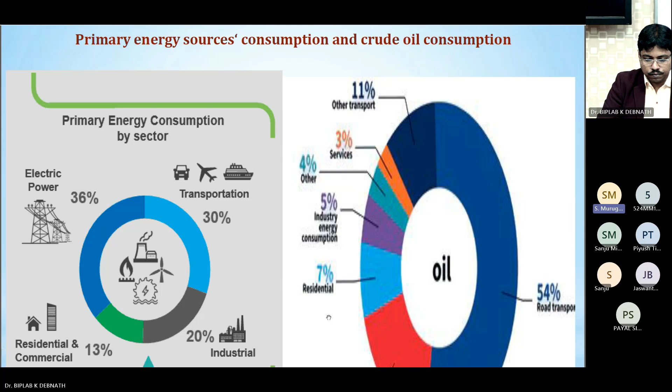So if you see this slide, the primary energy consumption by sector, in the left hand side of the slide you can see the primary energy consumption accounts for 36% in electric power generation, followed by transportation sector which accounts for 30%, and then 20% is shared by industrial sector, and the remaining goes to residential and commercial sector.

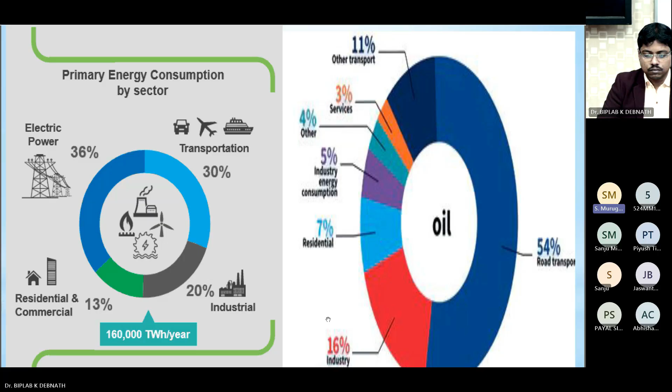Now on the right hand side of the slide, you can see the oil consumption in different sectors, especially crude oil. Crude oil is mainly utilized in transportation sector, especially road transport. It accounts for 54%. Then industry consumes 16%. Then the remaining goes to residential, service sector, industrial energy consumption, and other sectors. Next, please.

So it is inevitable to avoid the consumption of these primary energy sources. Why? Because crude oil, coal, everything is available by nature. So you have to continuously use them. Not using coal and petroleum fuels will also give problems. So in that sense, we can use these primary energy sources to some extent in future, but we have to switch over to some other alternative fuels which can substitute.

Of course, we cannot completely eradicate the use of primary energy sources, but we can replace, let's say, 20 to 30 percent by the use of alternative energy sources. Especially nowadays we use renewable energy sources like solar, wind, hydro and ocean thermal energy sources. But apart from that, we can use biomass also, which is abundantly available in nature.

Now, in transportation sector, we cannot control carbon dioxide completely because all automotive vehicles are mobile in nature. So CO2 is continuously emitted because vehicles are moving. Therefore, we cannot completely control CO2 emission with any device.

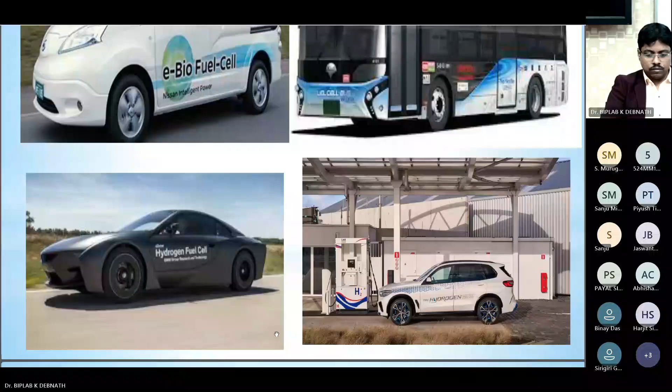Actually, we are thinking about using electric vehicles everywhere, but recently BMW says goodbye to electric vehicles. It says that it will bring out hydrogen engines which can meet the demand for clean vehicles. As I told, electric vehicles have different issues or challenges that cannot be met immediately.

So we can use electric vehicles to a certain extent, but in a country like India, where there is a huge population, we cannot completely shift over from conventional ICE engines to electric vehicles. It will take a lot of time. So in that sense, BMW and other companies now in India want to parallelly bring out hydrogen engines, which can be used in hybrid mode with electric mode.

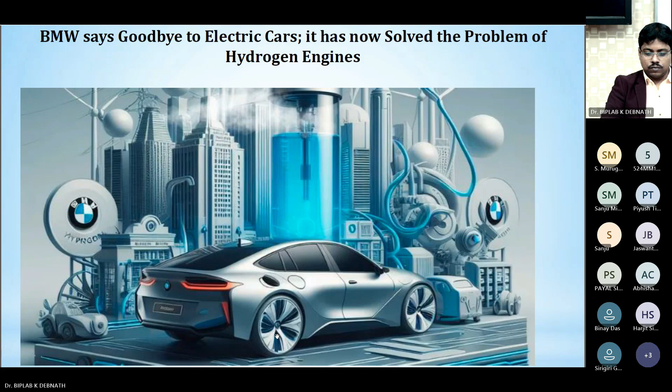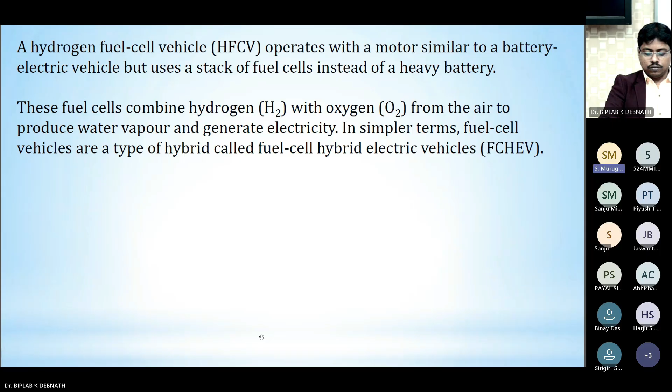So as I told, of course, we can have combinations of internal combustion engine and electric vehicle, or internal combustion engine, fuel cell vehicle, and electric mode, fuel cell and electric mode. These kinds of combinations were proposed many years ago, but now they are slowly in transformation. It will be realized soon. Already, these kinds of vehicles are available in countries like USA, Canada, Germany, UK, and all. But it will take a lot of time for this to be realized. Next, please.

So, hydrogen. Why do we have to focus on hydrogen? As I told, we have different options of using alternative fuels like biodiesel, ethanol, biogas, LPG, natural gas, and of course hydrogen. All these things are there. Among all these fuels, hydrogen is focused because, as I told, it's a carbon-free fuel. There is no carbon in it.

Hydrogen was earlier called the water creator. That was proposed by a scientist called Cavendish. Actually, hydrogen can react very well with oxygen, and it will form water, as you know. If you take water, it has two atoms of hydrogen and one atom of oxygen. So the simplest way of getting hydrogen is by splitting water into hydrogen and oxygen.

Hydrogen is a colorless, odorless, and non-poisonous gas, and it's lighter than air and helium. When you burn hydrogen, it will show a pale blue color, but it's almost invisible, so you cannot detect the flame you get when you burn hydrogen. What are the merits of hydrogen? It has a very high gravimetric energy density. The calorific value or heating value is very, very high. It's about 1,20,000 kilojoules per kg, and it is available everywhere. Water, you can take it.

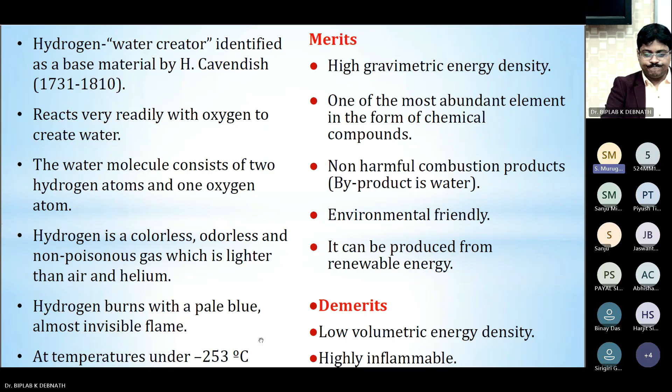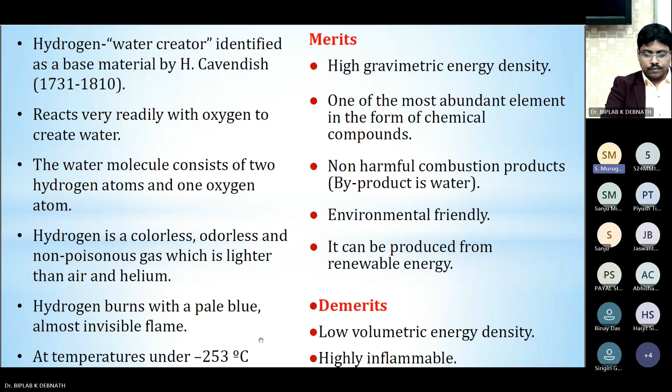It is one of the most abundant elements in the form of chemical compounds, and you will get zero pollutants like unburnt hydrocarbon, carbon monoxide, carbon dioxide, sulfur dioxide. Nothing will be there. But oxides of nitrogen will be found, but that can be controlled or regulated. Therefore we can call it a very eco-friendly or environmentally friendly fuel, and we can produce hydrogen from different sources.

But on the other hand, you can see there are three drawbacks. One is it has low volumetric energy density. That means you need a very big storage tank to accommodate this fuel in automotive vehicles. People are working on storing hydrogen in the form of solid, which we call metal hydride. There is continuous research going on in this aspect also. And it is highly inflammable, because the flame velocity of hydrogen is very high, so it can quickly catch fire. And it is difficult to store at normal atmospheric conditions, so you have to store it in the form of gas or liquid. Next, please.

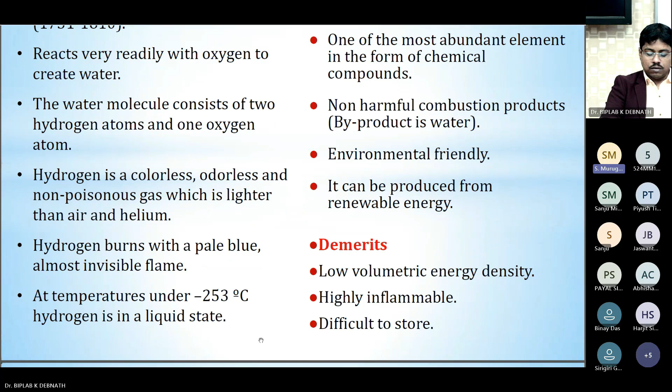So earlier, hydrogen was produced only by electrolysis. By splitting water by electrolysis, we get hydrogen and oxygen. Now, after the realization of alternative fuels and the need for hydrogen, many sources for producing hydrogen have been found. Based on that, in industry, different color codes are given for hydrogen produced from different sources, like green hydrogen, pink hydrogen, yellow hydrogen, turquoise hydrogen, brown, blue, white, like this. Although we give these color codes, they slightly vary depending on the country and time. Next, please.

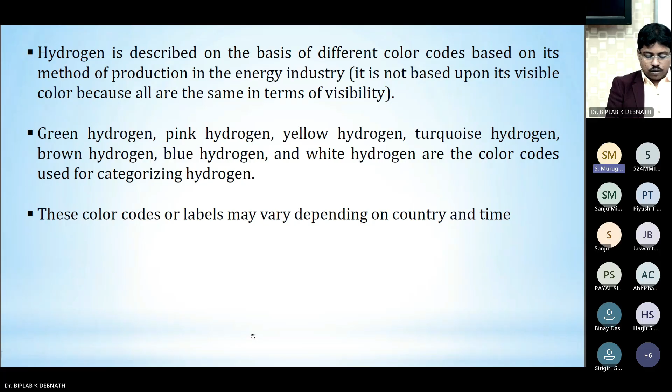So here the hydrogen production color codes are given. As I told, green, pink, yellow, blue, turquoise, gray, brown, like that. Each method by which hydrogen is produced is given in the second column. The third one is the feedstock or raw material we use to produce hydrogen, and the greenhouse gas footprint is also given.

Now, if you see electrolysis, as I told, that is one of the simplest ways to produce hydrogen. You split water so that you get hydrogen and oxygen. For splitting water, you need electrical energy, right? That can be obtained from different sources like wind, solar, hydro, geothermal, or tidal, whatever renewable energy source you can adopt. If you adopt it to break water through electrolysis, then the hydrogen you get is called green hydrogen. The greenhouse gas footprint is very, very minimal because we are using renewable energy sources in this method.

Now, hydrogen is used in many industrial applications, not only as fuel. Here, the left-hand side of the slide shows the different raw materials or sources by which we produce hydrogen. As I told, we can use coal, natural gas, oil, or electrolysis.

For electrolysis, we need electrical energy that you can obtain from different renewable energy sources. Coal, natural gas, and oil are treated as fuel or feedstock from which we get hydrogen. Most of the hydrogen is produced from natural gas and oil, then coal and electrolysis.

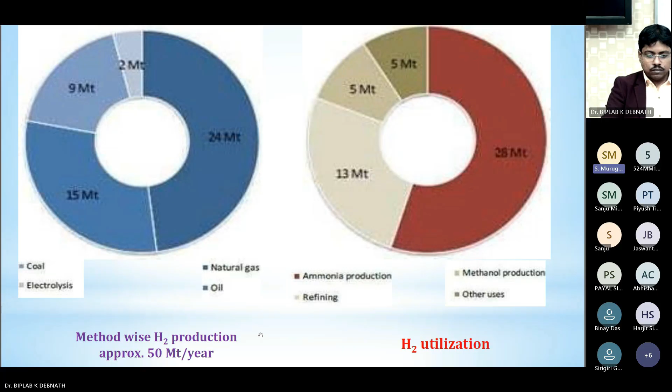Here you can see hydrogen utilization in industrial applications on the right-hand side of the figure. It is used for ammonia production, methanol production, refining processes, and other uses. Hydrogen used in ammonia production is about 28 megatons, followed by other applications.

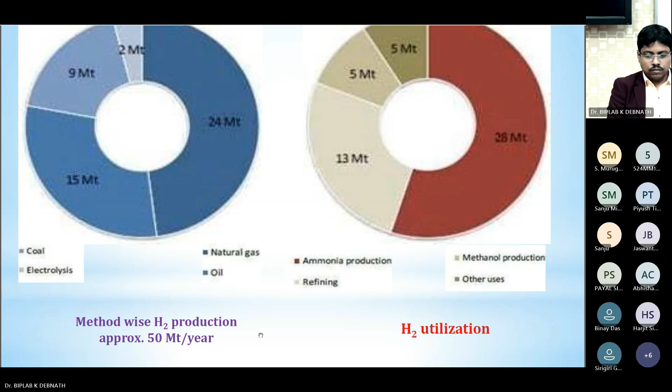Apart from these applications, nowadays we want to use hydrogen for automotive applications as well. So the demand for hydrogen production is always increasing.

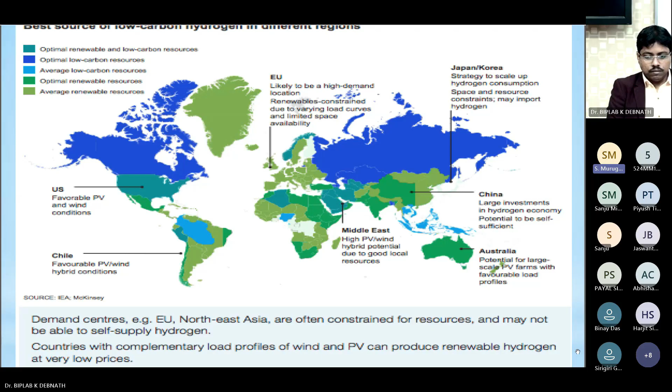This slide shows hydrogen production from different methods using different sources in each and every country in the world. As I told, we can use coal, biomass, or renewable energy sources like solar and wind to produce electricity first, then produce hydrogen. Different countries use different sources, highlighted in different colors here, green, blue, light blue, and so on.

Now, how we can produce hydrogen is very important. Electrolysis is a very simple process because you take water, supply electricity, and break water into hydrogen and oxygen. That's all. But other than this, we can use different sources like biomass, coal, natural gas, biogas also.

So we classify hydrogen production by using two different sources: fossil fuel and renewable energy sources. Under fossil fuels, we have two methods: hydrogen reforming and hydrocarbon pyrolysis. Under hydrogen reforming, we have three methods: steam reforming, partial oxidation, and autothermal reforming.

On the other hand, for renewable energy sources, you can use solar, wind, biomass, everything. We classify those into two: biomass process and water splitting. In water splitting, you have three methods: electrolysis, thermolysis, and photolysis. Electrolysis is the simplest, where by supplying electricity you get hydrogen and oxygen from water. Thermolysis and photolysis apply heat energy or solar energy for splitting water.

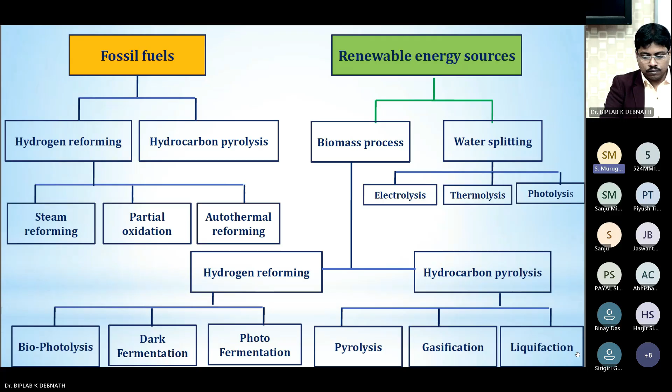When you use biomass as a source, we have two classifications of methods: hydrogen reforming and hydrocarbon pyrolysis. Hydrogen reforming has three methods: biophotolysis, dark fermentation, and photofermentation. Hydrocarbon pyrolysis has three methods: pyrolysis, gasification, and liquefaction.

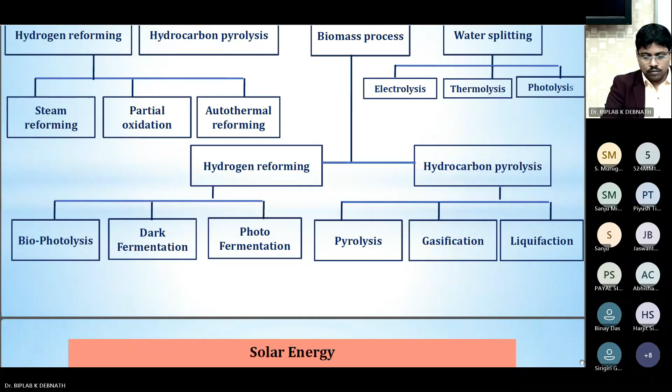Now, worldwide, emerging research is going on hydrogen production using solar energy, and then wind and other energy sources. Solar energy can be used to produce hydrogen by adopting different pathways or routes. From solar energy, you can get heat using a concentrated solar power plant, and that can be used to produce hydrogen via thermolysis.

You can also produce mechanical power from a solar power plant. Heat will be converted into mechanical energy, and then you can use mechanical energy to produce electricity, and that electricity can be used to break up water through the electrolysis process.

Other energy sources like wind, geothermal, ocean, and hydro can be used to produce mechanical energy or mechanical power first. Then that mechanical power will be converted into electricity with the help of a turbine, and that electricity can be fed to produce hydrogen via the electrolysis process.

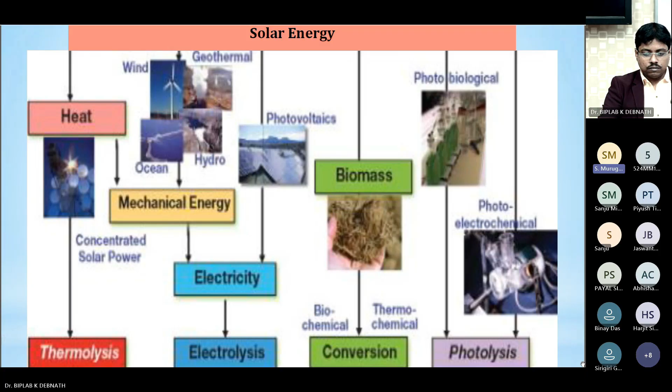As of now, commercially hydrogen is produced by involving four methods: steam reforming, water shift gas reaction, partial oxidation, and autothermal reforming. The main feedstock used to get hydrogen through these conventional processes is coal, natural gas, LPG, and naphtha. These are called carbon feedstocks, and they can be converted into hydrogen by adopting any one of these processes.

If you take steam reforming, normally we call it SMR, in chemical engineering or chemical industry. As I told, it can use a variety of carbon feedstocks. Biomass also can first be converted into biogas, and then it can be converted into hydrogen via steam reforming. Now, steam reforming is the simplest form of using methane as a feedstock. That's why biomass can first be converted into biogas, and then we convert it into hydrogen via this method.

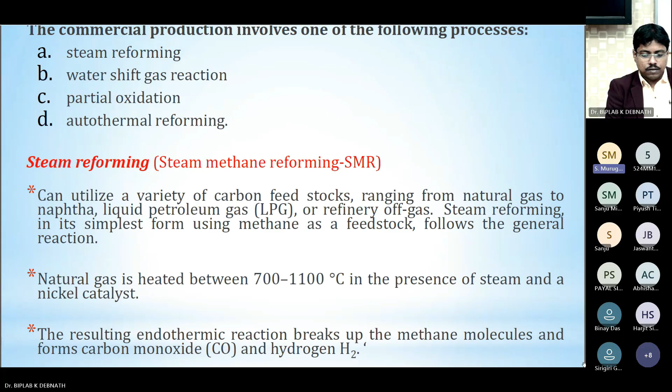So here, of course, this CO gas is separated from hydrogen. We have elements like CO, CO2 and other greenhouse gases that get separated. Depending on what kind of feedstock we use, you will get very high quality or low quality hydrogen. 1 ton of hydrogen produced will also produce 9 to 12 tons of carbon dioxide. But people, especially now in developed countries like the US, are capturing this carbon dioxide and utilizing it in different means from these refineries or hydrogen production units from natural gas.

So as I told, when you subject natural gas to a high temperature, you get this reaction: CH4 plus H2O gives carbon monoxide, 1 mole of carbon monoxide and 3 moles of hydrogen, like that.

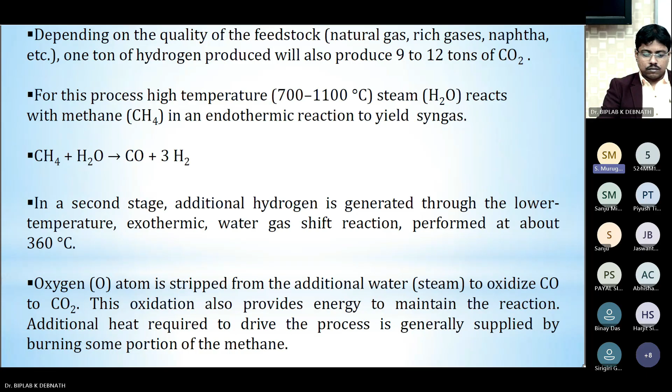Now, of course, we have a second stage or step. In that, additional hydrogen is produced through the low temperature exothermic water gas shift reaction, carried out at a temperature range of 300 to 400 degrees Celsius, again depending on the feedstock. Here, oxygen is stripped out from the additional water supplied, normally steam, to oxidize CO into CO2. That is called the water gas shift reaction.

This water gas shift reaction forms CO2 and H2 using water and CO at elevated temperature. You can use a catalyst if you wish, again depending on the kind of feedstock we use.

Then, of course, partial oxidation. Normally it's a basic gasification reaction, which helps to break down hydrogenated carbon feedstock, it may be coal or petroleum coke, whatever it may be. With the help of heat, we can crack it down or break it to get CO and H2. So that's called partial oxidation.

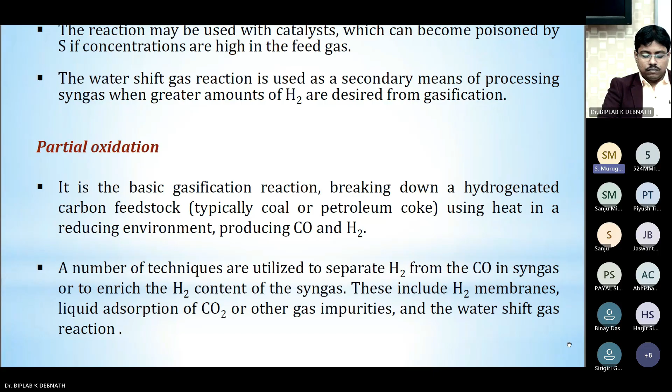Once you get this CO and H2, you can adopt different methods to separate H2 from that. This gas composition, normally CO and H2, is called syngas, and that will be separated, meaning H2 and CO are separated. We can adopt membrane technology to separate the hydrogen, or we can also use liquid adsorption of CO2 or other gas impurities, so that we can get more amount of hydrogen from this partial oxidation.

Then, of course, autothermal reforming. This is the term normally used to combine steam reforming and partial oxidation in a chemical reaction. It occurs when there is no physical wall separating the steam reforming and catalytic partial oxidation reactions. Here also we use a catalyst that controls the entire reaction, so that we get hydrogen at the end of the process. This autothermal reforming can operate at a low temperature compared to partial oxidation, so at very low temperature also you can produce higher amounts of hydrogen.

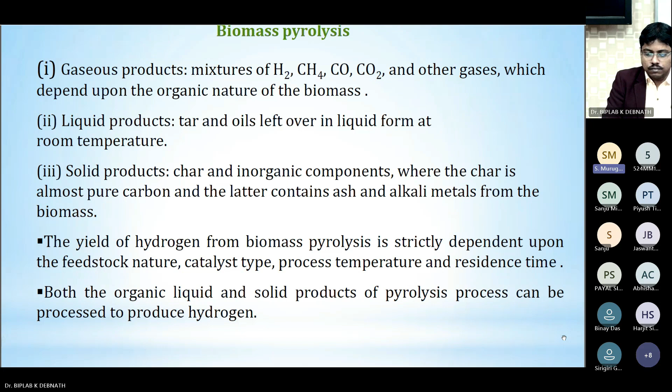Now, biomass can be used to produce hydrogen by adopting two different routes. One is called biochemical conversion and the second one is thermochemical conversion.

In biochemical conversion, we use yeast or bacteria, microorganisms, to fractionate the feedstock to get either biogas or ethanol through biochemical conversion. We have two methods: anaerobic digestion and fermentation. Through these two routes, we can produce biogas in anaerobic digestion and ethanol in the fermentation process. With the help of microorganisms, with or without application of pressure, we can get biogas from digestion and ethanol from fermentation. This can be further converted into hydrogen, which I'll come to later.

In thermochemical conversion, as I told earlier, we have mainly three methods: liquefaction, pyrolysis, and gasification. In this process, the feedstock is converted into hydrogen by adopting either pyrolysis, gasification, or liquefaction. Here we need to apply heat, slightly, with or without pressure.

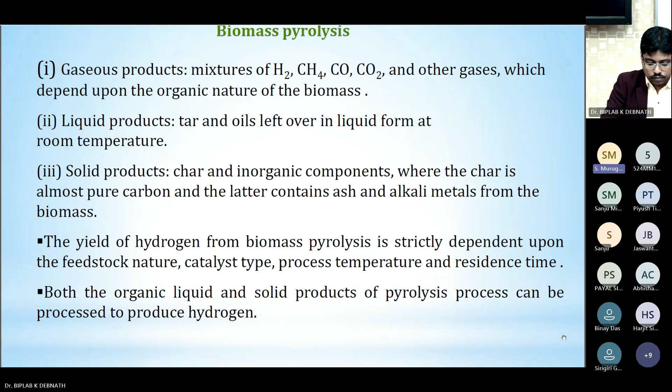Now people are taking oil which is obtained from the pyrolysis process and converting it into hydrogen. The solid product you normally get in a pyrolysis process is called char and inorganic components. You will get a very small amount of hydrogen from that, but people are working on this as well.

Next, please. Next. So this slide you can show, of course.

Actually, in pyrolysis, any biomass substance is fed into a pyrolysis reactor that is completely free from oxygen, or with little presence of oxygen. That pyrolysis reactor is heated up. When the biomass in the reactor is heated, volatile matter rises from the biomass, and that volatile matter is condensed in a condenser, so that you get the three different products I told you about: gaseous product, liquid product, and solid product.

Normally, if you use a biomass substance, the liquid is called bio oil. The gas you get, which is not condensed, is called pyrogas. That is composed of carbon monoxide, carbon dioxide, and hydrogen, and the hydrogen can be separated. People are working to convert this bio oil into hydrogen, and finally you get a solid substance in the reactor.

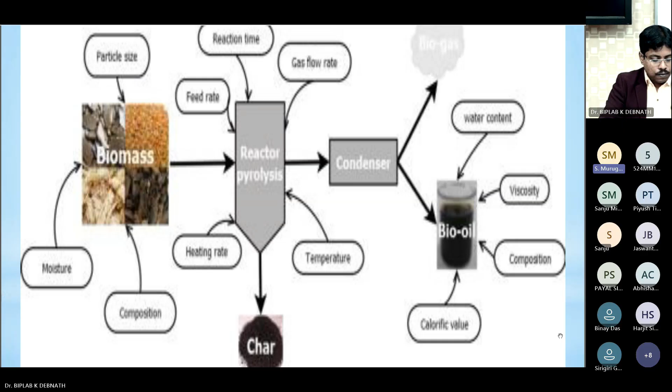Now there are different parameters that affect the feedstock you use in the pyrolysis reactor. If we take biomass, the important parameters that affect the hydrogen yield in later stages depend on the feedstock you first give as input: particle size, moisture, composition of feedstock, like that. In the reactor, different parameters influence, like feed rate, heating rate, temperature, gas flow rate, and retention time or residence time of the pyrolysis.

These factors influence the quality of the three products you get: bio oil, biochar, and the gas which is not condensed. These three products vary according to the type of feedstock you use and the influential parameters. Now this bio oil is mainly focused on now to get hydrogen. The quality of bio oil depends on the water content, viscosity, and the bio oil composition and nature.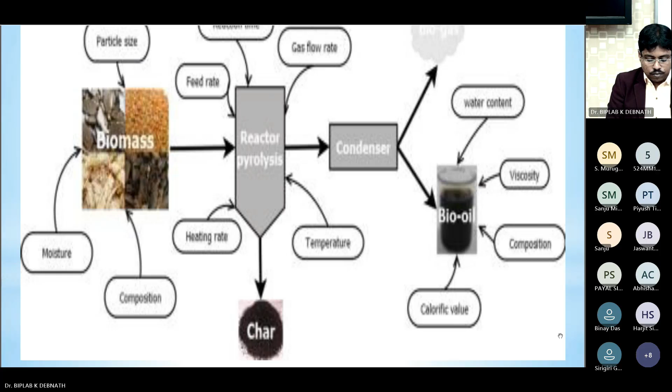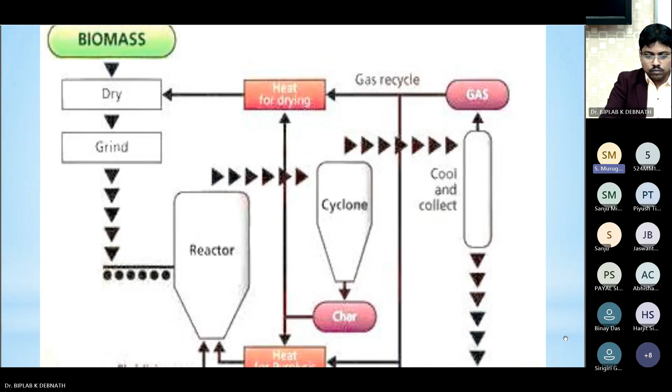So here the illustration of pyrolysis is given. Normally you can take any biomass, first dry it, then grind it, then feed it to a reactor and heat it up. As I told, pyrolysis can be carried out either with a little presence of oxygen or completely free from oxygen. When you want it completely free from oxygen, the reactor must be evacuated before you feed it. So people purge nitrogen, which is an inert gas, into the reactor, completely evacuate oxygen, and then use the reactor for the pyrolysis process.

The volatiles raised from the reactor are first sent to a cyclone separator, where high density particles are removed. Then the gas is given to a condenser. When the volatile matter is condensed, you get the bio oil. Some of the volatile matter may not be condensed; that is taken as non-condensed gas and used for drying the biomass feedstock. You also get char, which can be separated from the cyclone separator as well as the reactor, and that can be further processed to get hydrogen in a minimal portion.

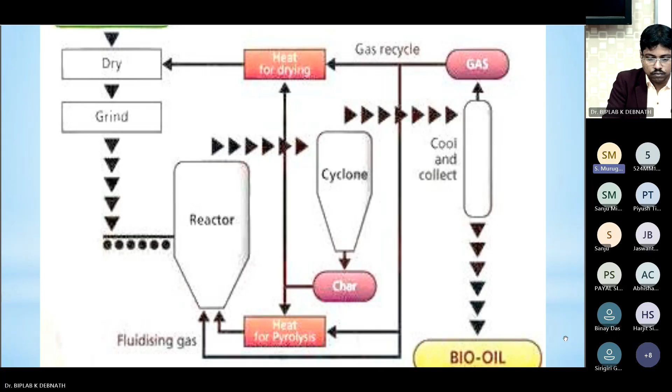That I don't focus. Only people now working on is that to get hydrogen from bio oil and of course gas. Next, please. So here of course different biomass feedstocks were used to get hydrogen using biomass pyrolysis, like wheat straw, pine wood, of course wood, like that.

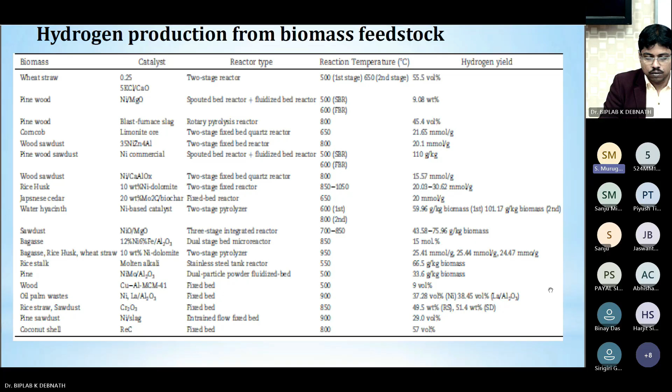Then liquefaction, of course, liquefaction can be given in two forms. One is direct liquefaction and the second one is hydrothermal liquefaction. Of course, you liquefy any substance, that's called normally liquefaction. It's a small process. Hydrothermal liquefaction, that's also called hydrous pyrolysis, where the biomass is converted into liquid fuels in the presence of water

by maintaining a temperature between 226 degrees Celsius to 362 degrees Celsius with the application of pressure ranging from 5 to 20 megapascal. So you have to have a catalyst in this process as well. That means hydrous pyrolysis. So you'll get a liquid product that will be further processed to get hydrogen. So here people, they use aquatic biomass, garbage, organic sludge, like that. They investigated to get hydrogen from this kind of feedstock via liquefaction process. Next, please.

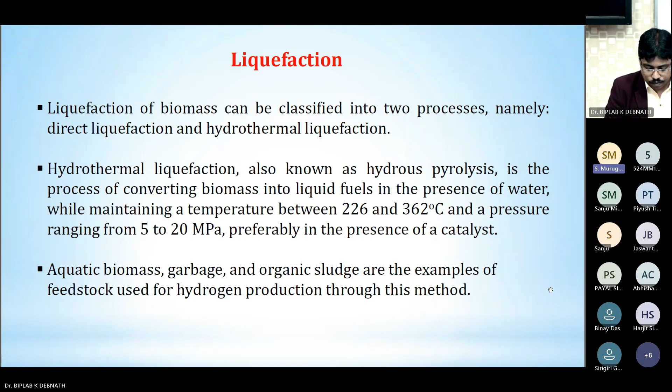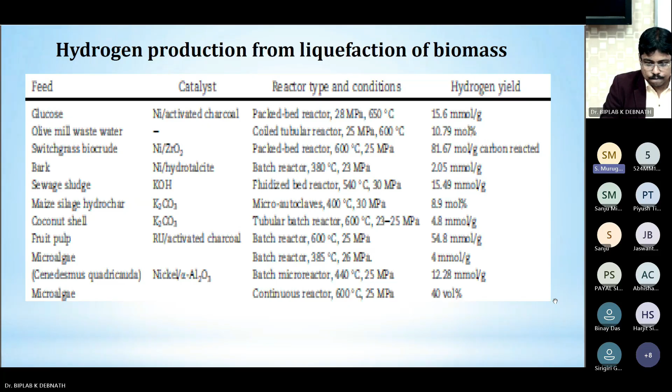Then, of course, here this table shows different feedstocks which are considered to produce hydrogen via liquefaction of biomass. That I just pass it. Next, please. Then biomass gasification. Of course, under thermochemical conversion process, we use gasification also. So here, of course, in gasification, what we do, we feed a feedstock in a gasifier, and oxygen is supplied in very little quantity, and then the gasification process is carried away so that you will get a product called syngas.

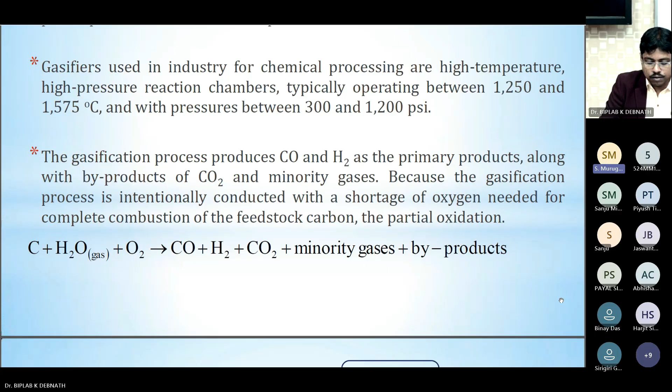That syngas normally is composed of carbon monoxide and hydrogen. So this syngas, of course, will be separated by adopting different processes. So normally in the gasification process, we'll get carbon monoxide and hydrogen as a primary product. Apart from that, we'll get some minor gases also. Minor gases, as well as we get tar. That I'll come to in the next slide. So what kind of biomass you use, based on that you'll get the syngas quality and the tar quality.

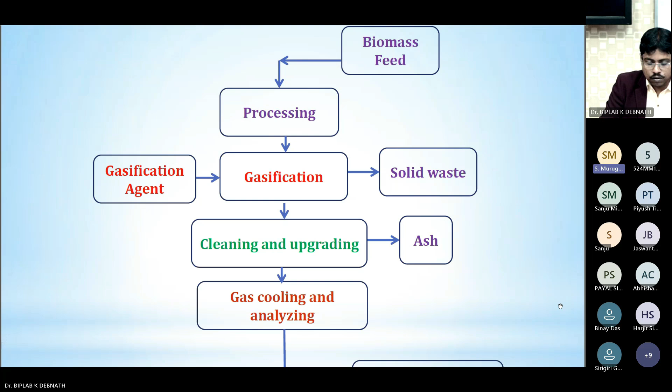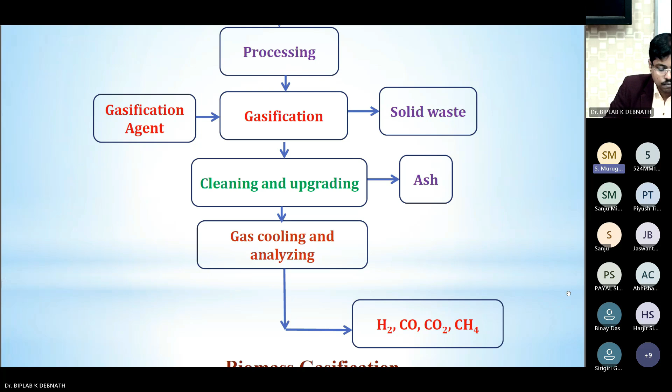So here this slide shows how the gasification is carried out. Biomass is fed, first pre-processed, and then it is given to your gasification process. It's fed into a gasifier. So you have to, of course, supply gasification agent, normally oxygen or air. Then you will get the syngas that will be cleaned and upgraded, then cooled. Then we'll get the separation of gases: hydrogen, CO, CO2, CH4 and all, they'll be separated. This is a basic idea what you get in gasification process. Next slide will give more information.

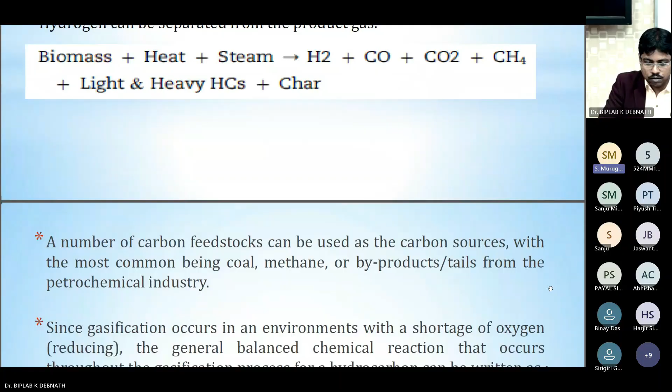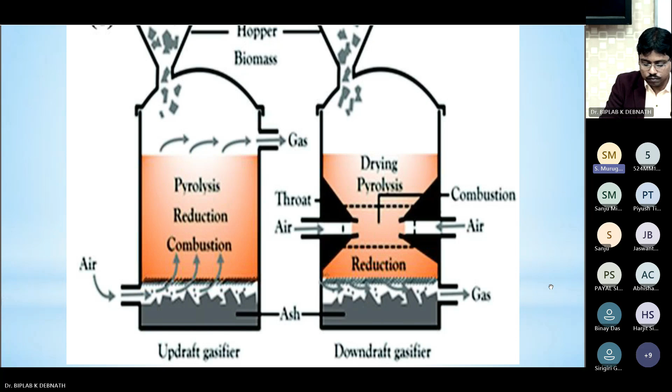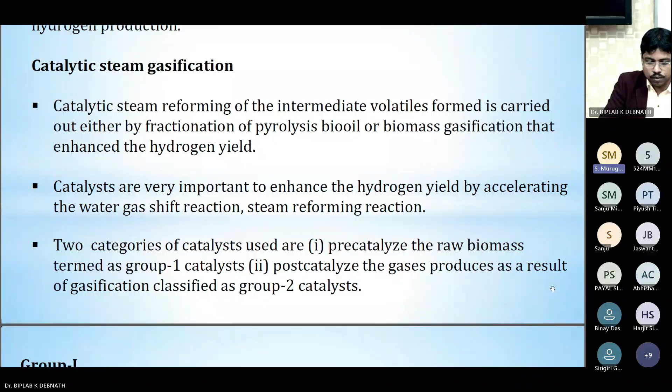So ash is a big problem in the gasifier. Continuous ash removal is a problem. So here, no, previous slide, please. So the quality of syngas is very, very important. Syngas contains carbon monoxide and hydrogen. So there are different issues associated with the gas cleaning and the yield you get for hydrogen.

Normally, the moisture content present in the gas is a big problem, and tar formation is the second problem. Continuously, you have to remove this tar. Normally, you can use dolomite to reduce this tar, and of course, you can increase hydrogen production or hydrogen yield. Moisture content in syngas cannot be completely removed, because based on what kind of biomass we use, some moisture will be present in the gas, and you have to remove that first before cleaning.

Here, once you get the syngas, we can use catalytic steam gasification. Catalytic steam reforming helps to convert intermediate volatiles formed in the gasification zone. Right? So you can use a catalyst to get more hydrogen from the gasification process. Whatever syngas you get has to be further processed to get hydrogen. You can adopt either the water gas shift reaction or the steam reforming reaction. Next.

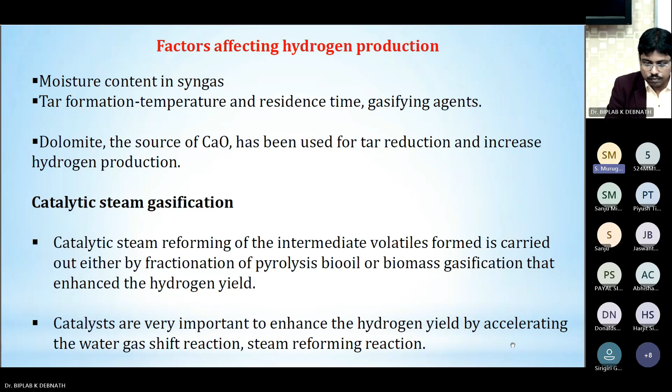So here we can use two different catalysts to enhance hydrogen production in gasification. The primary catalysts are normally added directly to the raw biomass or feedstock before the gasification process, so that you can get more gas. And the main purpose of using this catalyst is to reduce the tar content. But the problem is, as long as you operate the gasifier, you have to continuously remove this tar. So this primary catalyst helps to increase the gasification reaction rate and increase hydrogen production also.

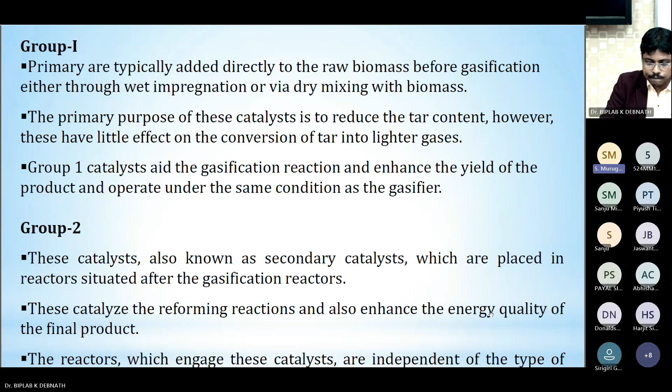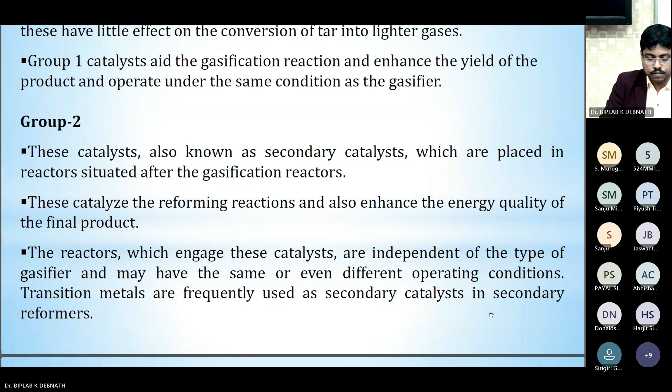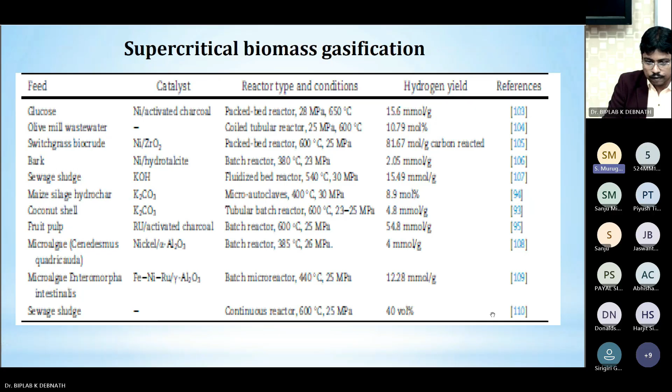Nowadays people also use supercritical biomass gasification, which is a slightly advanced version of this gasification process. When people adopt supercritical biomass gasification, they use different feedstocks like glucose, olive mill wastewater, switchgrass, biocrude, bark, sewage sludge, like that. From that they got hydrogen at different yields, which is shown here. What kind of reactor and what kind of catalyst they use is shown in this table. Next, please.

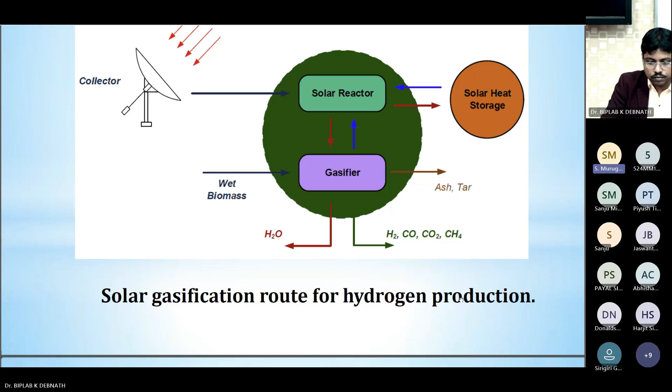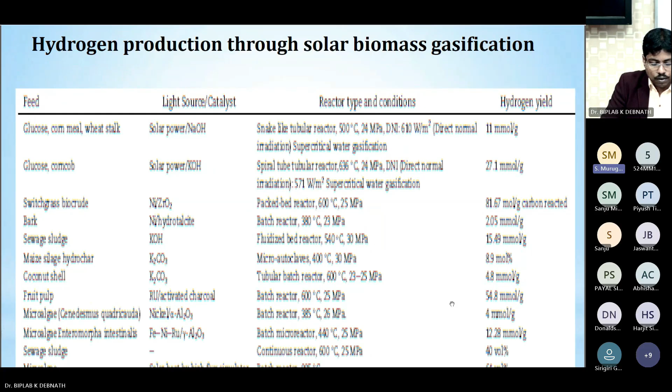So here, when you use solar biomass gasification, the hydrogen yields you get are shown in the last column. The different feedstocks used by different researchers are given in the first column on the left-hand side. Here you can see what kind of light source or catalyst is used in solar biomass gasification, like solar power, and at the bottom, solar heat by a high flux simulator. From there they get the heat, and then they adopt the gasification process. Next, please.

And of course, non-thermal or biological process. Non-thermal means what? We don't supply heat or we don't use heat, but we adopt biological process. As I told, of course, you can use biogas. From biogas, you can get methane. Then methane can be converted into hydrogen. That is one route. In addition to that, we use biophotolysis also.

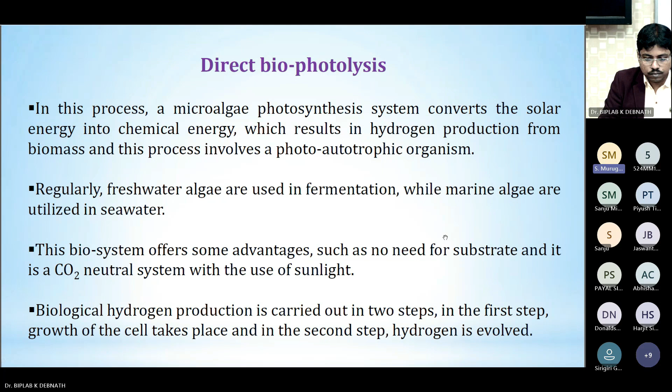So here we have two biophotolysis processes. One is direct biophotolysis and the second one is indirect. So in the direct biophotolysis, microalgae photosynthesis system converts solar energy into chemical energy that results in hydrogen production from biomass. So that is one route. Now it is recently adopted, and it is upcoming research in hydrogen production.

So here generally people use freshwater algae as a feedstock. They are used in fermentation, and marine algae that are utilized in seawater. These two are used for producing hydrogen. So here, with the help of this process, we can get a more amount of yield from biomass substance, especially algae. And here there is no need for substrate.

Like in biogas, what we do, digestion process is carried out, anaerobic digestion process. So here we don't do such kind of process. Straight away we get hydrogen from biomass. So here we have two steps in this biological hydrogen production. One is growth of cell, and the second one is production of hydrogen. Next.

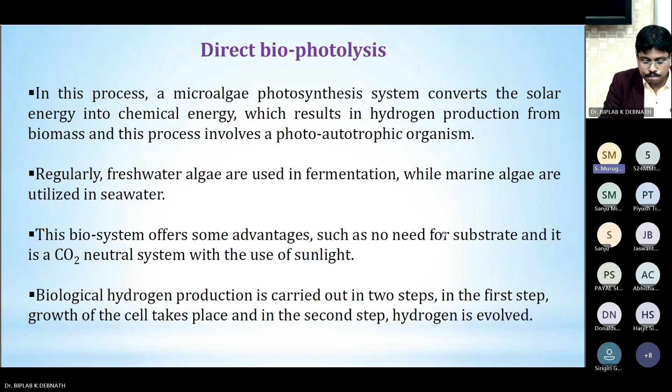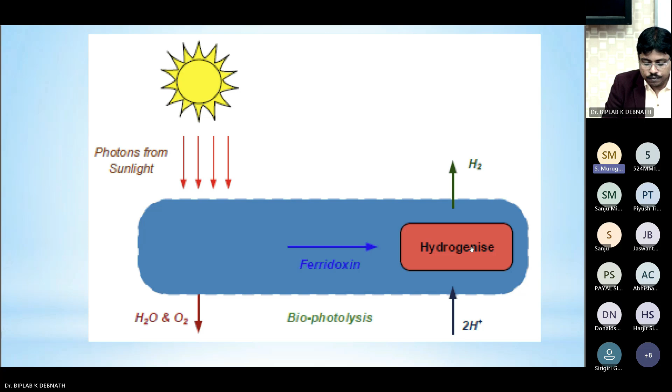So here you are using two systems. One is photo system 1 and the second one is photo system 2. So photo system 1 is used for carbon dioxide reduction, while photo system 2 is used to produce hydrogen by splitting water. So here, of course, with the help of solar energy, we get it.

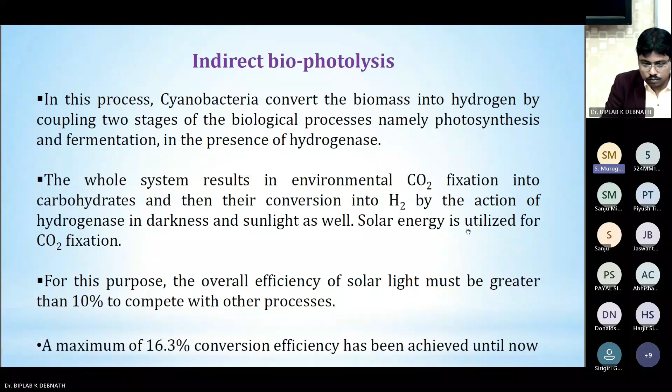Next, indirect biophotolysis. So here, actually, there is a bacteria used, cyanobacteria, that converts biomass into hydrogen by using two stages, as like previous one, namely photosynthesis and then fermentation. So normally this photosynthesis and fermentation is carried out with the help of sunlight, of course, without sunlight and in the presence of hydrogenase.

So here, of course, we get more amount of hydrogen because what kind of feedstock you use, that's very, very effective in producing hydrogen. That's why the overall conversion, in spite of the methods you use in the previous one, we get a maximum 16.3 conversion efficiency from the feedstock to hydrogen. Next.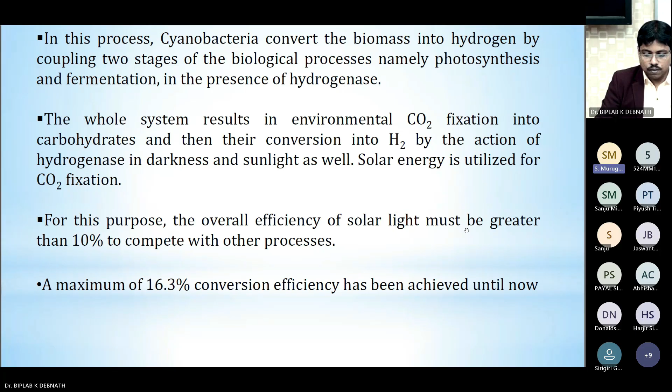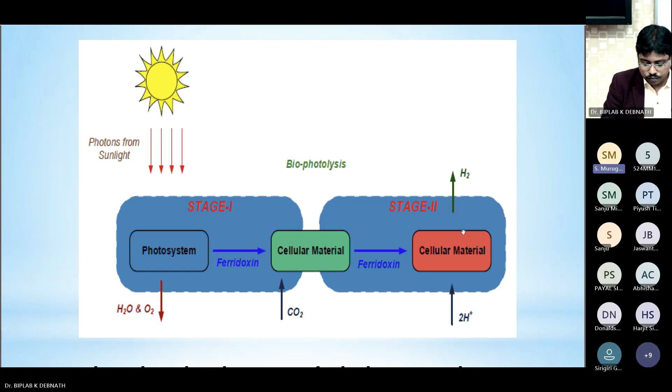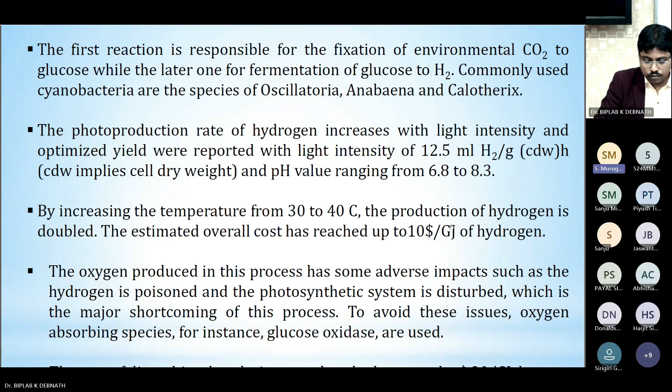So here you can see there are two stages. Here we have photo system 1, then you have cellular material. In between that, reaction takes place and you get hydrogen. Next, please. This and all, it's purely biological oriented. This also you can skip.

Photo fermentation, of course. In fermentation, what we do? For example, in normal fermentation process, ethanol is produced using yeast. But here in photo fermentation, photosynthetic bacteria utilize the nitrogenous matter to convert biomass into hydrogen. And that happens in presence of sunlight. That is very, very important. Next.

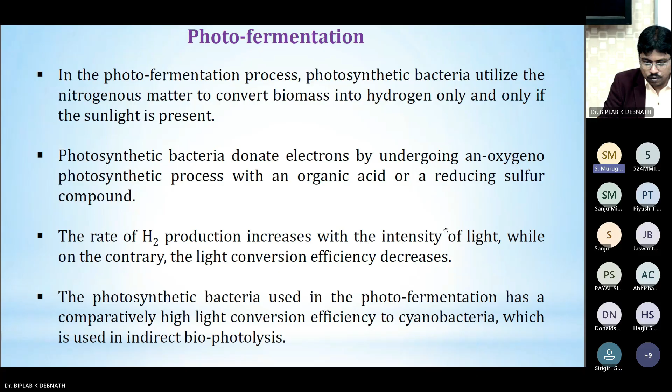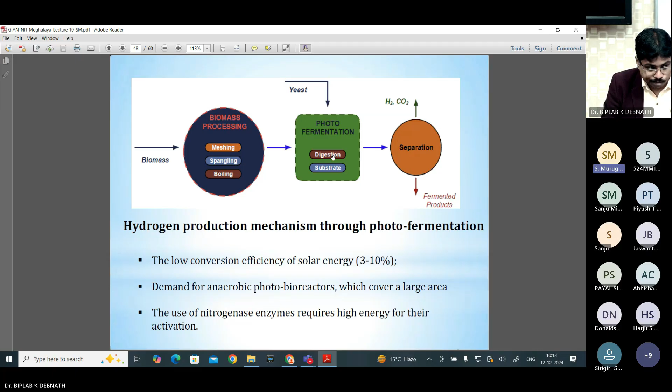So here we allow yeast in the photo fermentation reactor, and substrate is added, and the fermentation takes place. Then we get a mixture from where you will get hydrogen and CO2. So here the conversion efficiency is about 3 to 10% in the photo fermentation process. And the size of the reactor required is big. So that is one of the hurdles for carrying out the research. Next one.

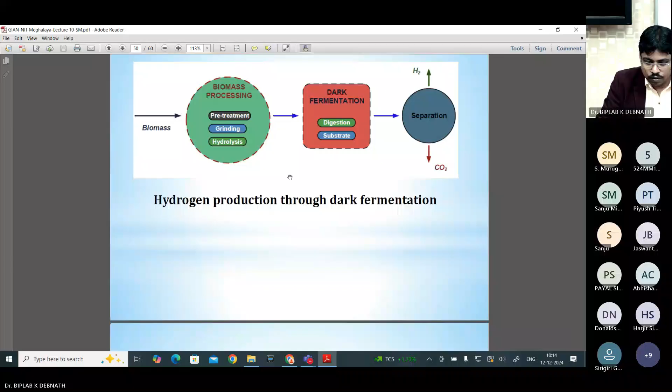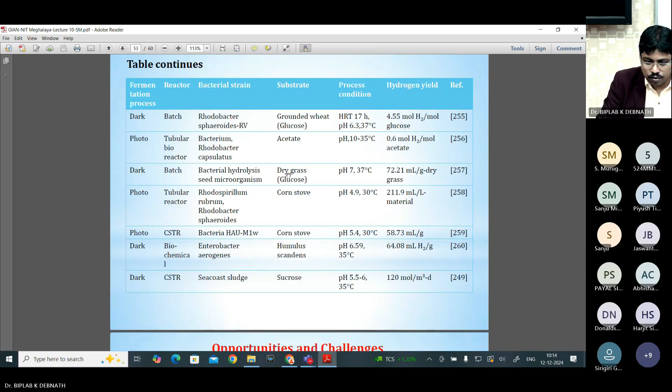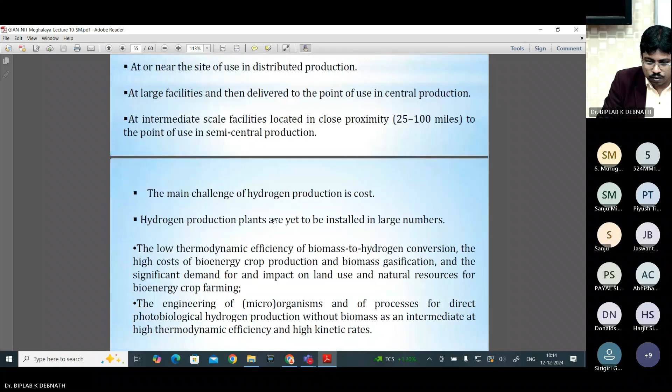One more thing is there, dark fermentation. This I skip because of time. No, this one. So here, of course, next, please. This also you can skip. These are all results of dark fermentation. Previous slide. Next, next.

I'm sorry. Challenges are there, no? Opportunities and challenges. Of course.

What are the opportunities and challenges in hydrogen production? Of course, as I told in the earlier slide, the first slide, there's a big gap between supply and demand. How much hydrogen is produced as of now is not sufficient to meet the requirement in automotive application. Therefore, it is necessary to produce a large amount of hydrogen.

In current practice, coal, natural gas, and water are used as main feedstock. If you have abundant water, then water can be converted into hydrogen through the electrolysis process. Despite that, if water is not present, then we cannot carry out the electrolysis process.

But now people do research using wastewater available in industry and municipalities. So wastewater can be converted into hydrogen, but first we have to convert wastewater into water and then water into hydrogen by electrolysis process. People are doing this research on how to convert wastewater into hydrogen.

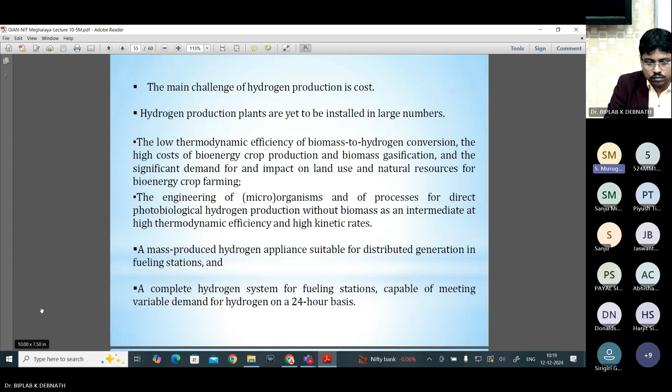So people are working on catalysts, chemical catalysts, biocatalysts, enzymes, to produce hydrogen. So there is still a long way to produce hydrogen from different sources. Anyhow, I hope India will produce at least a significant quantity of hydrogen in forthcoming years.

So due to time availability, I have to skip some of the slides. I'm sorry to speed up my presentation. No, it's fine, please. It's okay, sir.

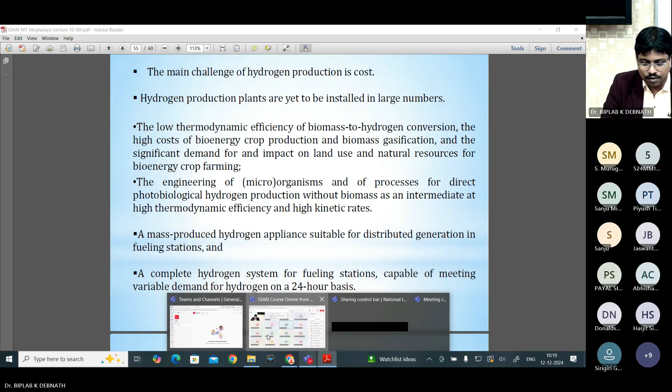So here I want to conclude. I want to summarize. I told about different methods like steam reforming, partial oxidation, autothermal reforming, biomass gasification, aqueous phase reforming, electrolysis, photolysis. Different technologies have been explored so far by many researchers, with different feedstocks.